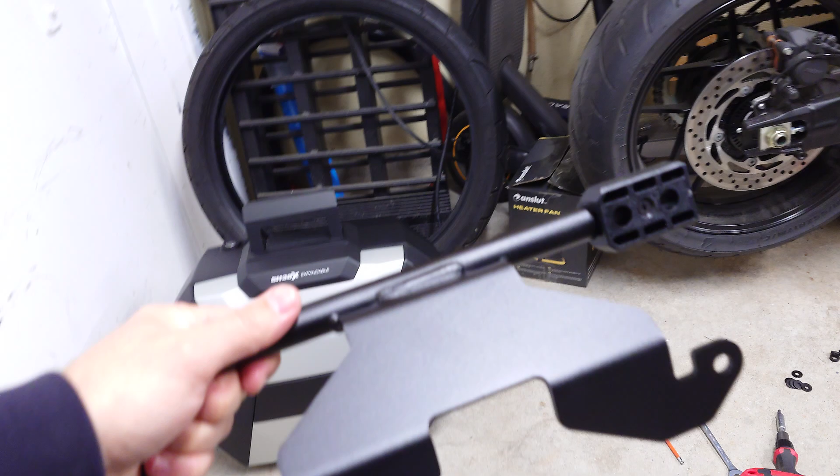So this is the bracket, or the holding bracket, you have to attach to your motorcycle. My motorcycle is a Suzuki 1050 DE, but this bracket will mount on basically all the Suzuki V-Stroms from 2014 up to the latest model, 2026. Well, this is a 2024 model, but it's the same, as you can see here, it's the same bracket. The motorcycle is unchanged.

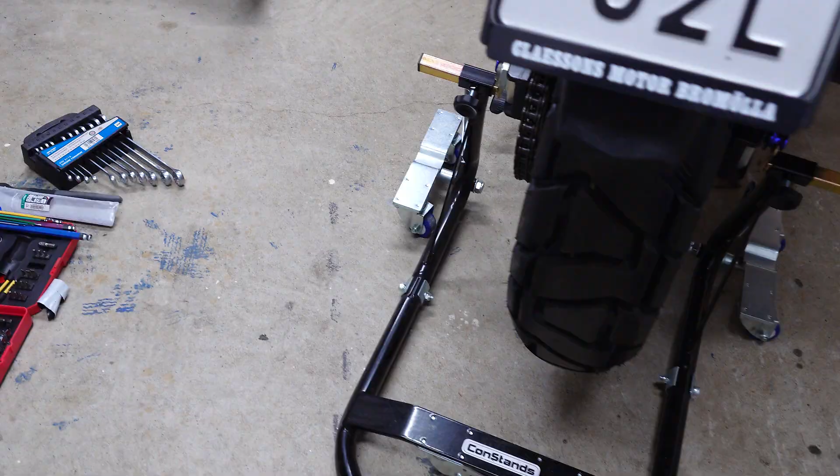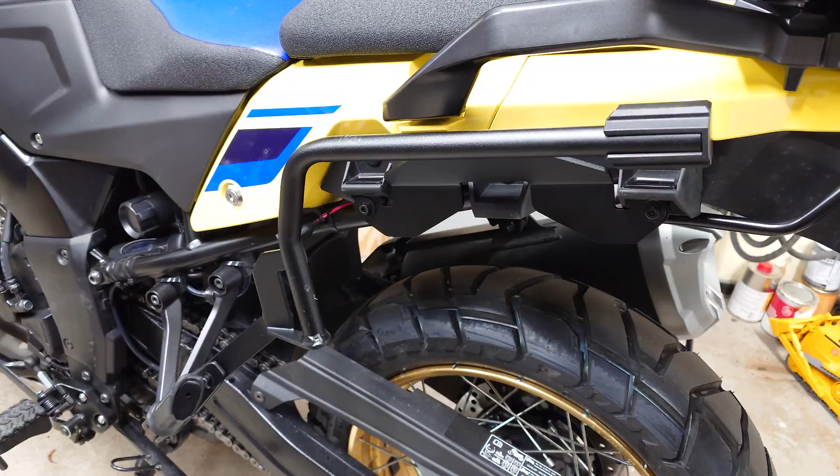I mounted the bracket on the other side. I'll show you. This is how it looks. It's very discreet, I liked it. That's why I chose a 3-piece system. I had it on the other motorcycle before, some years ago. You can barely see it, and I really like this.

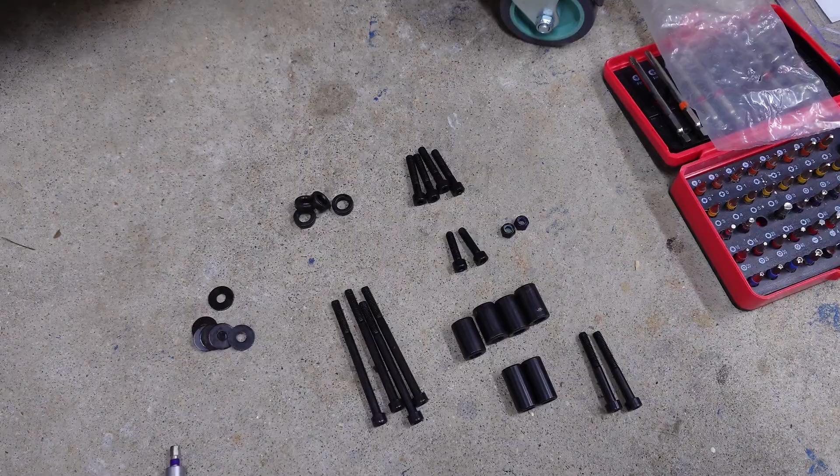So I'll show you what you need. You get some bolts and nuts and some washers, and let's go through them.

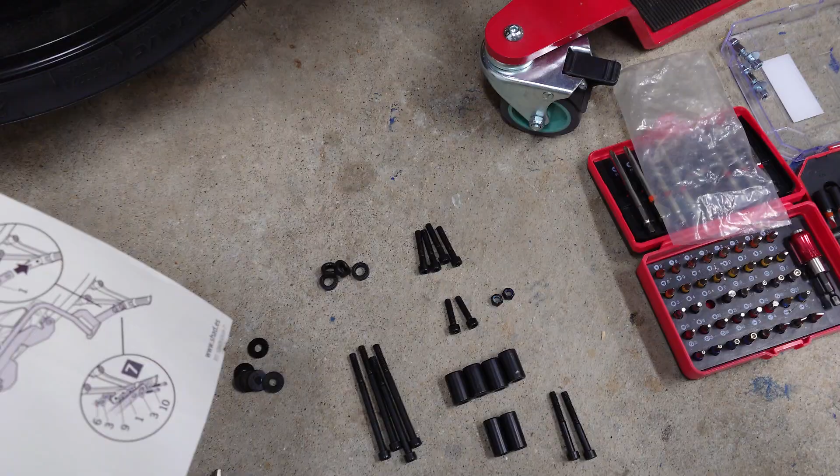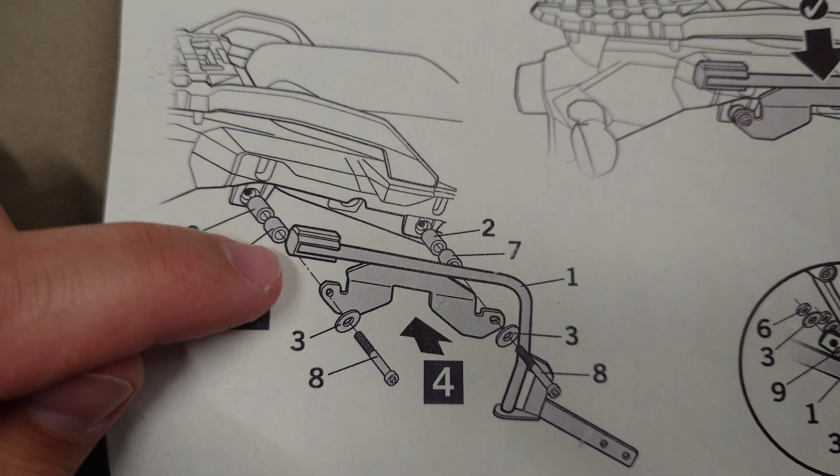These ones, the thicker ones and shorter, together with these, you will need them only if you buy the SH23 panniers, which are smaller, but for some reason, I don't know why, they will mount further away from the motorcycle. So you will add both spacers. But if you don't plan to purchase these panniers, then you have to use only the smaller, thinner, but a little bit longer spacers, 2 on each side.

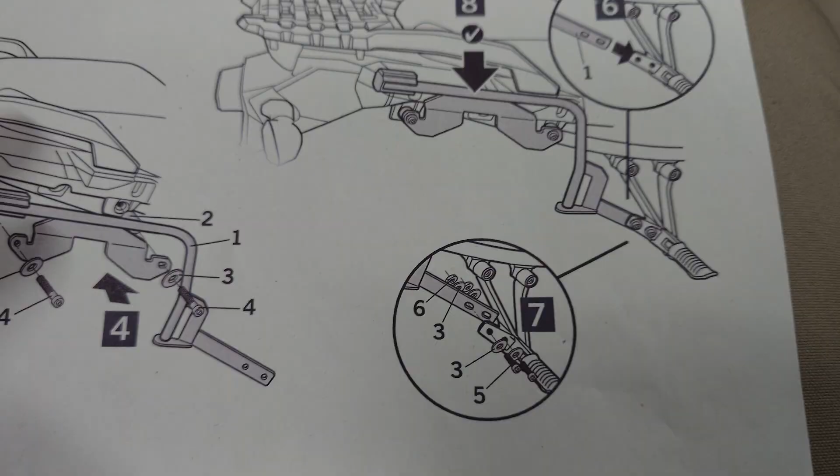So I have 2 left for the right side, and then you'll use the shorter bolts, not the longer ones. And at the same time, if you use the 3-piece mounting system with other panniers, but not the SH23 ones, then the bracket will mount behind the peg, the passenger pillion peg.

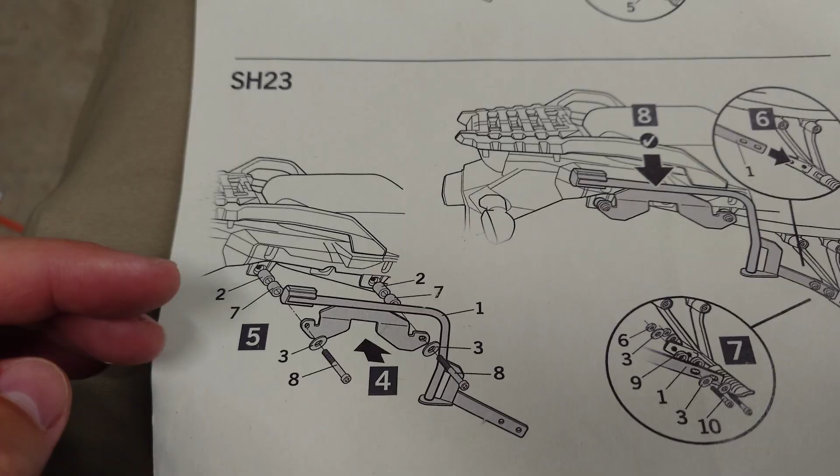But like I said, if you plan to buy these panniers, then the brackets will come further apart from the motorcycle. You will use the spacers together, and then this part of the spacer will come on the exterior side.

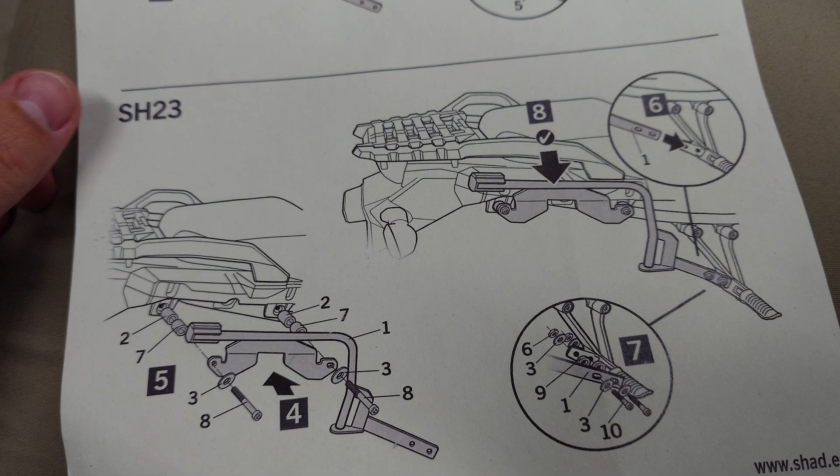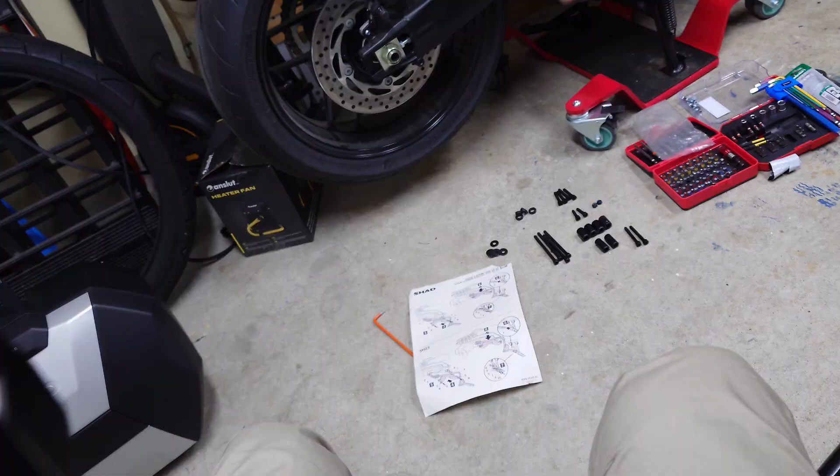So this is not my case. This is my case, okay? Because I have the 38X, and it's a very simple thing to do to mount this, except one thing, and I'll show you in a second.

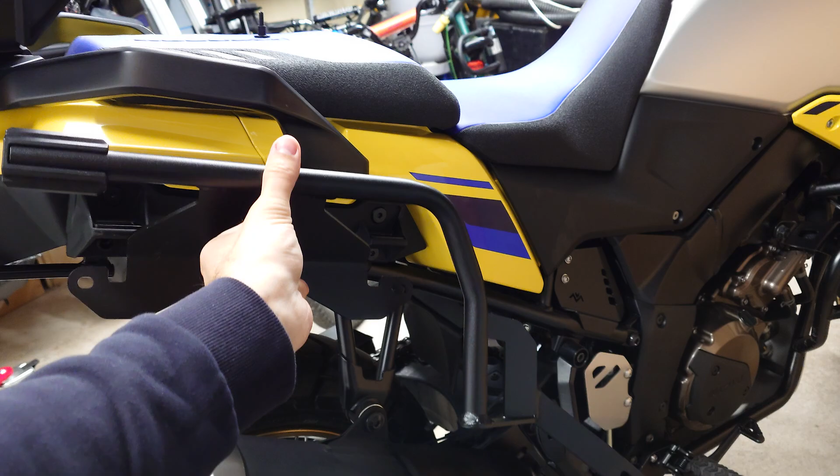So let's see, this is the motorcycle, and this is how the bracket... let's see. Okay, so motorcycle, and the bracket will come like this, and then let's put this down. Okay, and then so that part will come behind.

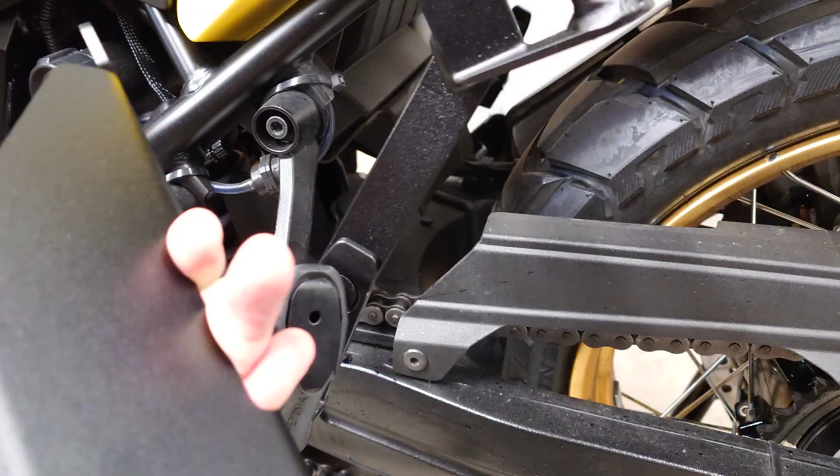But if you have those smaller panniers, then you'll have it in front, and then you'll have to use all the spacers and the longer bolts. Just to show you how it came up here. See? Like this. And this is behind. Okay, so super easy to install,

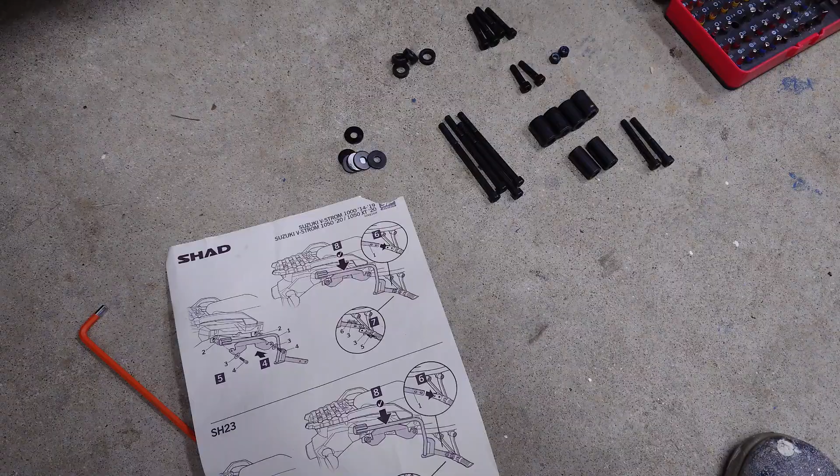but there is one detail that you have to know about if you have this motorcycle. And oh, excuse me, I'm a little bit allergic.

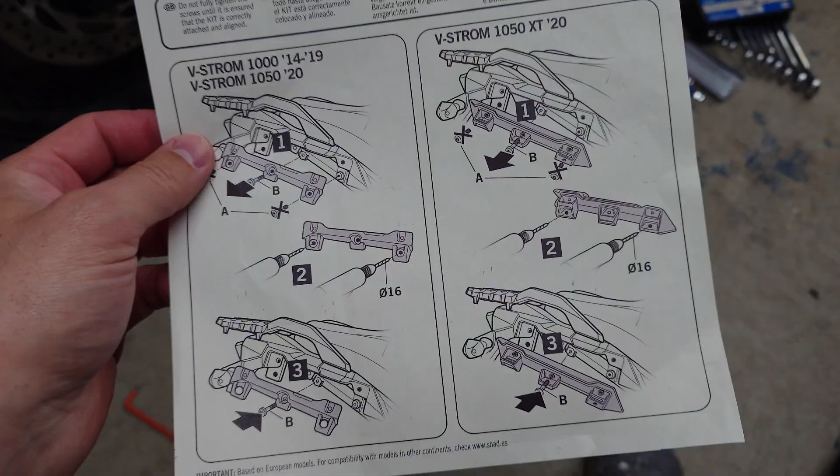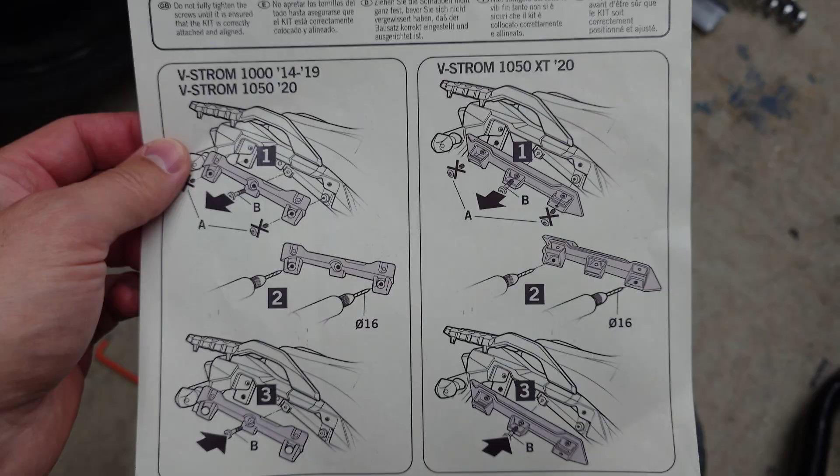So this is the first blade, the content of the box, and this is what you have to do. Like I said, it's the same kit for the older motorcycles and for the later motorcycles, V-Stroms 1050 or 1000.

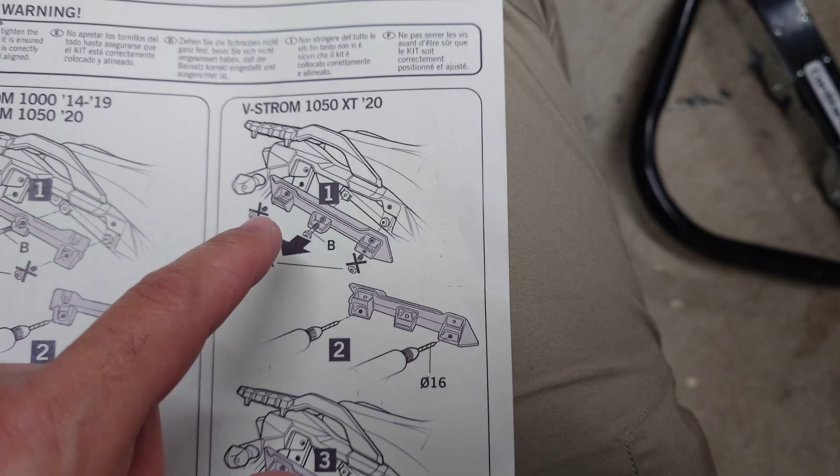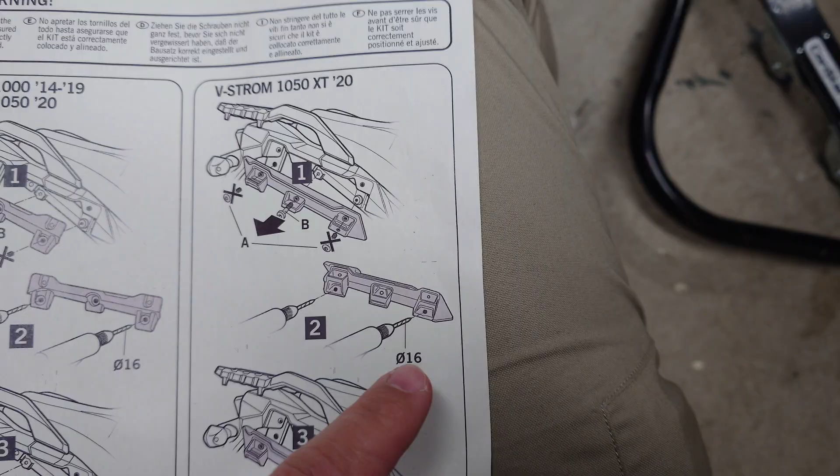So we are here, and we just have to remove these plastic parts. They have 1, 2, 3, 4, 5 bolts. Remove them, and you have to enlarge the holes to 16 millimeters. I think they are 11 millimeters

from the factory. So you have to drill a larger hole and then put it back, and then in those holes you will slide these spacers and then fasten with those bolts.

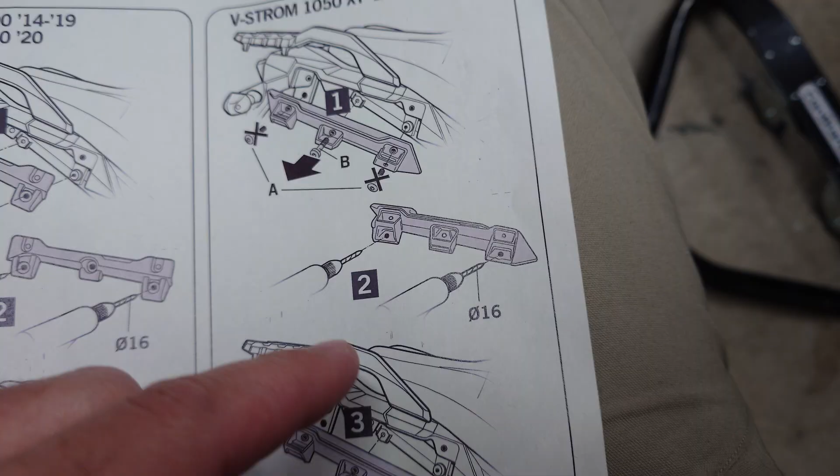Well, this is the part that can be complicated for some, because you already have pretty large holes in that plastic bit, and you have to make it larger, but at the same time you want it to be in the same place. You don't want to have to drill a larger hole on the side. And if you have some experience, when you try to make a hole larger, the drill will bite into the material and have a tendency to go to a side or to hop around and make a mess.

So I'll show you how I did it. It's easy if you have the tools. I'll show you in a minute. And for the whole thing, you only need a 5mm Allen key and a 10mm wrench for the nuts that will be on the backside of the pillion peg. I'll show you. But let's remove.

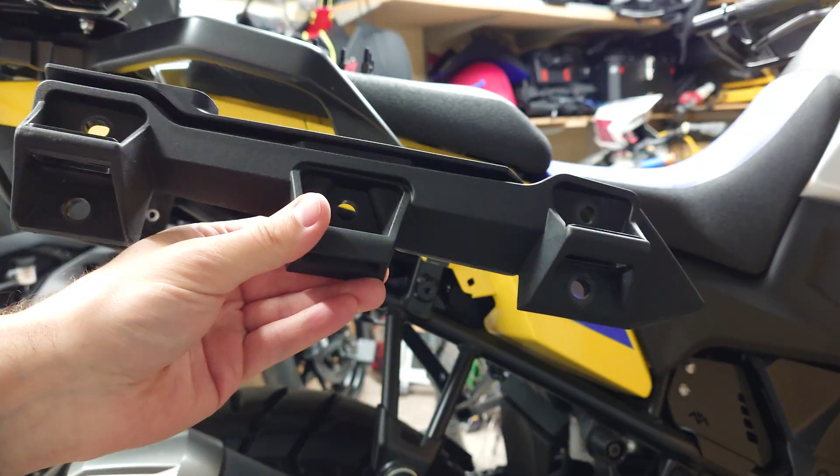And one more. This is the part, you'll have to make it larger here, the hole here and here, and that's it. So I'll show you how I did it.

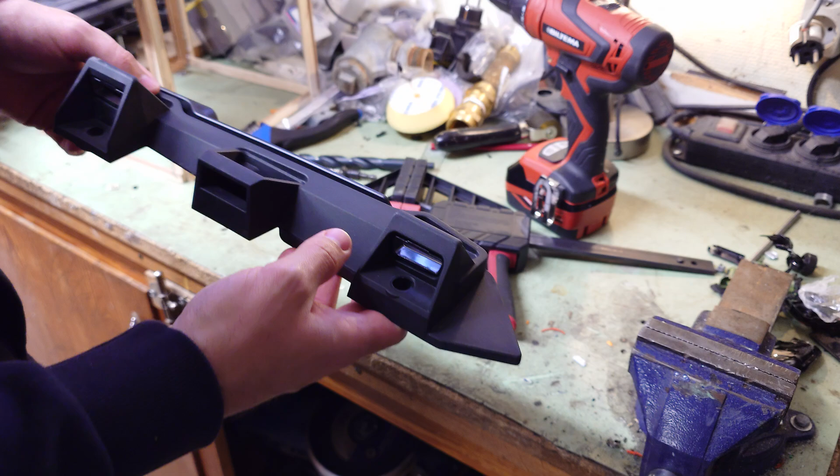This piece has a pretty weird shape and it's pretty hard to keep it in place. The best thing I came up with was to put it on the side of the table and fasten it from this part, this triangular shaped part. Let's see, so now it's staying in place.

It's better from this side. Yeah, okay. So now I find that...

I could use this type of drill, this countersink drill. I think it's used on wood, so you can put a screw head at the same level with the wood. Obviously I don't need this, I just need this conical shaped drill. This is just to start the hole, to make a little bit larger hole at a conical shape, and then a 16mm drill that will come inside that pilot hole, if I can call it like this, and will stay there.

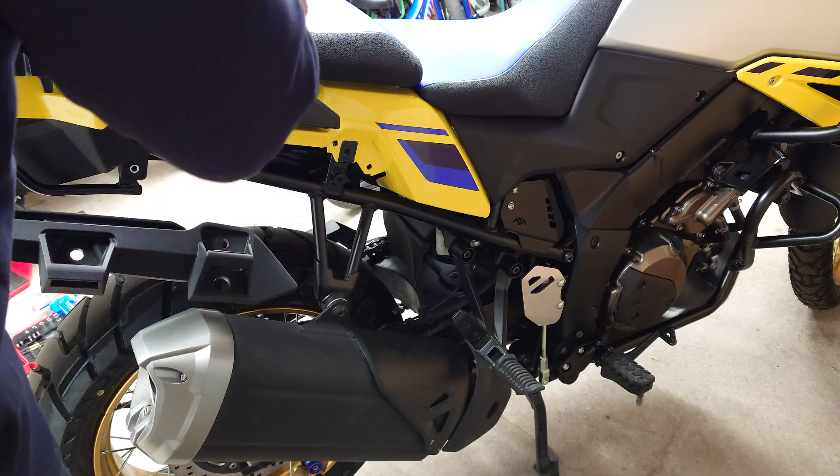Okay, so back to the motorcycle. So I'm gonna put it back and we're gonna use 2 screws or bolts, this and this. The same original bolts.

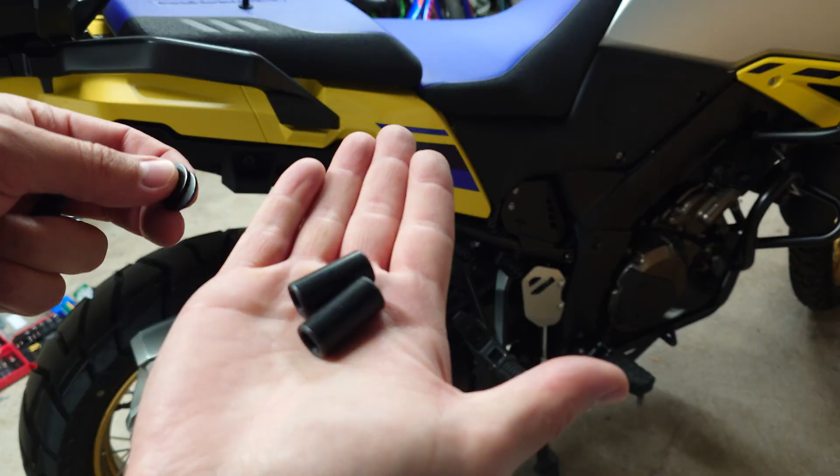So like this. Maybe we can sit this one here also. Let's see if I can.

And I did a mistake, I put it in front. Great, let's remove this one. Don't want to. Okay, now it's coming behind. Okay.

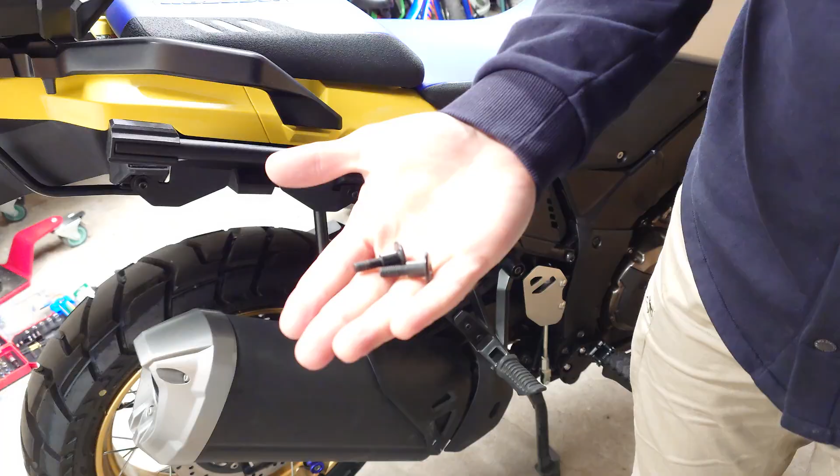And I'll show you on the other side because I have better light, how easy. Let's push this.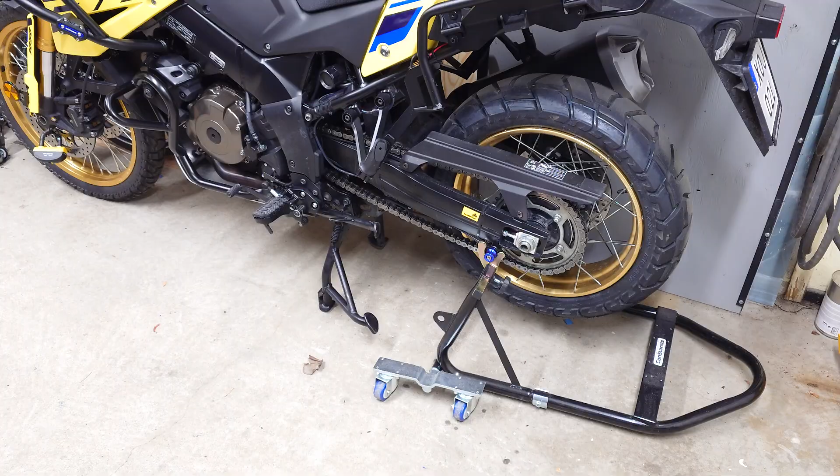Show you with the case, with the pannier. So 2 points, 1, 2, 3. In order to attach the pannier, you have to use the key. And this will go on the side, I think. Let's see.

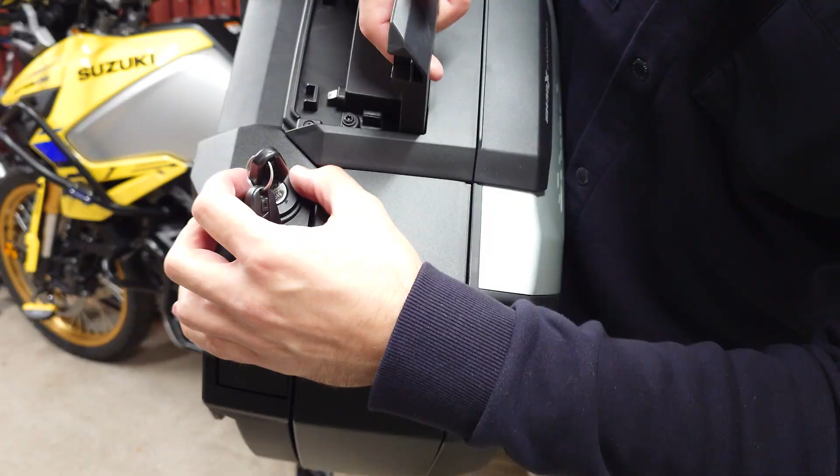Oh, I forgot, they are brand new, so I never used them. So I just put the key in this position and then lift this. Let's see. Okay. Super easy, close it if you can.

So that's it. Like I said, I'll come back with a small review about these panniers. They're nice.

You have to raise the handle, turn the key. Okay.